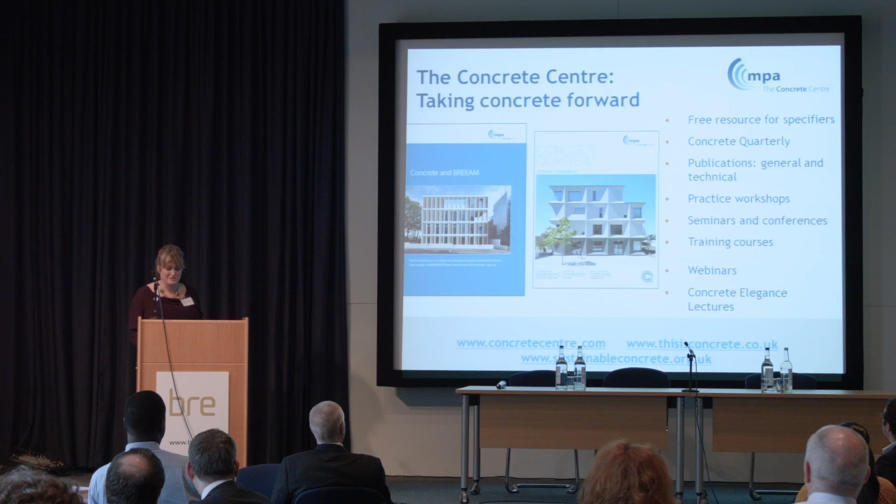One of the publications we've produced is this one, Ahead of the Game, which is outside, and hopefully some of the publications we have brought with us today, but there are many, many more on our website, concretecentre.com.

At EcoBuild earlier this year, one of our main themes over the 3 days was resilience, and we brought together a series of different speakers to talk about the subject, and within this document we've just collated some thoughts about best practice examples. It's an area that we recognise is of a growing consideration.

There's new credits within BREEAM related to it. There's certainly issues in the new HQM standard for homes, Home Quality Mark standard, that the BRE are developing.

But before I go into the role of concrete within resilience, because actually concrete and masonry has a really key role to play within the built environment with regards to providing resilient solutions, I thought I'd just paint a little bit of a broader context about concrete within a sustainable built environment, because fundamentally that's what we're talking about, isn't it?

We're talking today mainly about flood issues, but it's all about sustainable communities and sustainable environment. The industry are very committed to that, and their commitment was consolidated back in 2008, where pretty much most of the concrete and masonry material supply signed and committed to a construction concrete industry sustainability strategy.

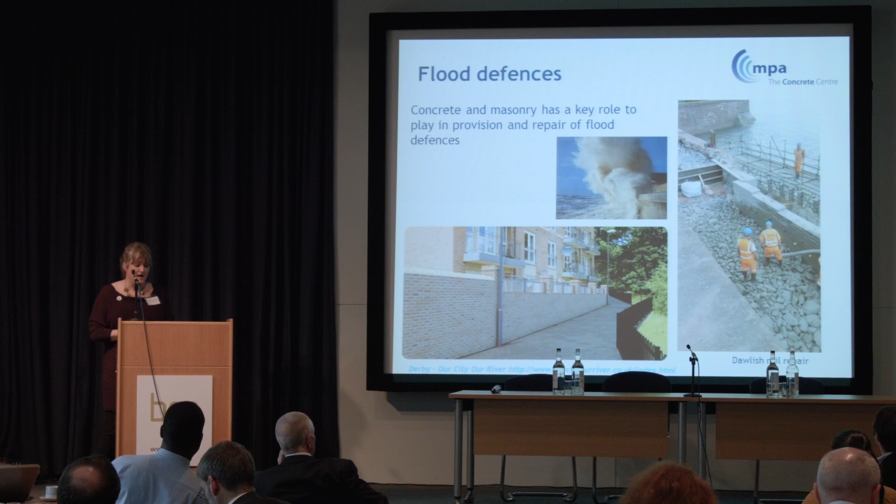It's inherently resistant, it performs well in water. It's why we have concrete sea defences, it's why we have concrete footings and foundations. Concrete can be designed in various different ways, particularly improved to resist aggressive environments like seawater, and in fact a very low carbon cement, particularly with GGBS, is very good at dealing with that.

It's got a real role to play in the use for flood defences and in flood repair. The Dawlish rail repair was completed two weeks ahead of schedule, I think, significantly using off-site precast concrete walls and retaining walls that could be brought in and craned in to resolve those solutions. Now, flood defence is only one part of the whole discussion - we need to be looking at this from macro down through to micro level.

There are many different SUDS products out there that are made using concrete - you wouldn't necessarily make that analogy, but of course there's lots of permeable paving.

It looks like concrete, but actually water just flows through. There was a video mentioned earlier that's gone viral on Facebook and elsewhere. We've got it, you can come look at the stand outside, or we can put it up on the computer - gallons and gallons of water dumped on the floor just disappearing as if by magic. It's quite extraordinary. There's lots of innovation coming through for solutions to help reduce the risk of flooding in and around a home.

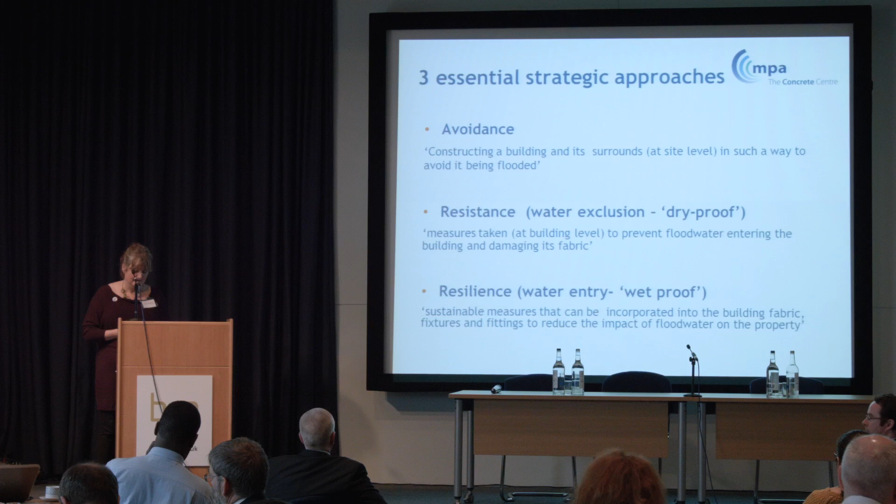I think what's beginning, and certainly what I would advocate, and it seems the new British standard coming out is advocating too, is merging those two approaches together. It's a sensible approach - it's not an exact science predicting floods. So if we can provide solutions that enable us to keep water out, but also, if it does get in, limit the amount of impact, then that's the way to go.

A few years ago we produced some documents and guidance that consolidated a lot of the best practice thinking about designing with concrete and masonry, using it in flood construction. They're quite long in the tooth now, these documents, and I suspect we'll be revising them when the British Standard comes out, hopefully soon.

Within there, one of the key things worth thinking about is that if we get the bones and structure right - making the right decisions appropriate to whatever level of risk has been identified in that building - then there's always the ability to think about what future mitigation measures can be added on as and when required, if deemed necessary. I think the managed adaptation route is an important part to think about.

If you think about it early enough, you can recognize what a strategy might be. For example, on the outside, in early days you might put in stainless steel ties at the low level of the building. You might think about putting in engineering bricks just at the low level because they're more resilient than a handmade brick to the effects of water. Or you decide not to do that now, but know that at a later date, if things got really bad, you have a good, robust structure that you could then just render.

That's all able to do that with the decisions that you've made at an early stage. I think that's one of the ways to be thinking about how we do that. And the key thing is, it's not a million miles away from what we're already doing. And that's what I want to try to illustrate.

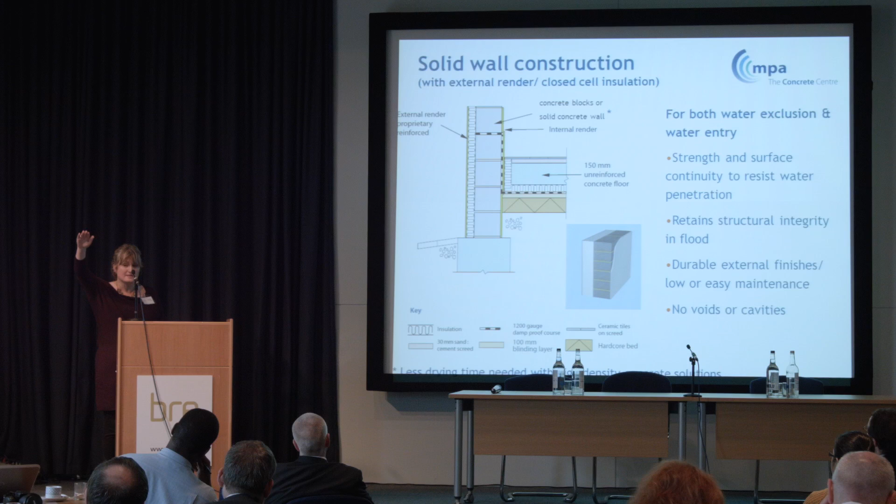And of course, it's robust, stops the water entry, there's no voids in there. The key issue with all of this, actually, it always comes down to insulation, doesn't it? So closed cell insulation, something that's going to be able to be maintained there. Location of where the damp-proof course goes - maybe we just need to be putting our damp-proof courses slightly higher up within our buildings than we do as a matter of course. Maybe that's one way of looking at it.

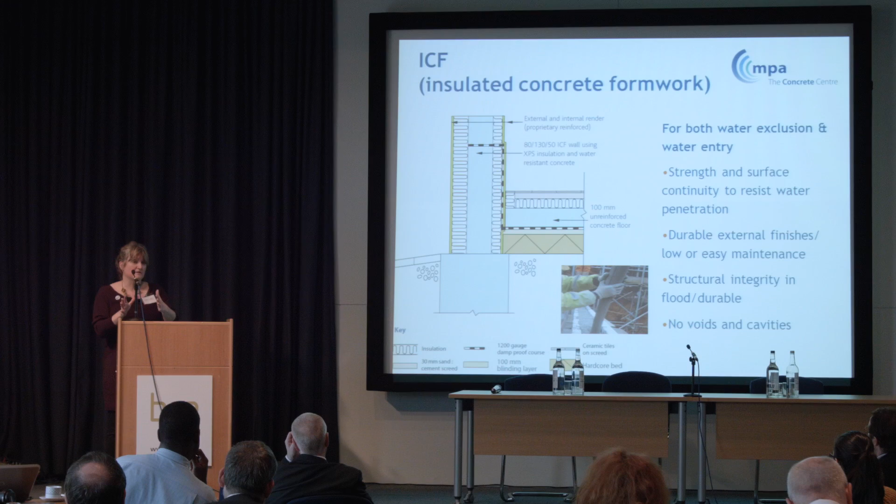There's a very limited amount of on-cost associated with just tweaking how we do these things. Anybody aware of insulated concrete formwork as a construction system? This is something that's a growing part of the market, particularly within self-build as well. It's a very simple way of being able to provide in situ concrete, but using an insulation system so that the panels are stacked together, and that's a permanent mould, if you like, that you pour the concrete into.

Often used for basements. It's a very good water weather-tight form of construction. And again, inherently strong and robust in its ability to keep water out. And depending on where you put your membranes, it allows for drying afterwards.

Slightly more of a challenge with cavity wall construction, which is fundamentally what most of the things that we build within the UK are. I think, did I mention that most housing within the UK at the moment is still, it's about 85 to 90% masonry - that's the way that we build these days, so blockwork and brick.

It varies according to where you are in different regions within the UK, but I think the cavities are the ones that we need to be thinking about, and there's a lot of lessons to be learned from the retrofit market and things that can be done to buildings in terms of closing off weep holes and how we plug those at a later date.

But I think, again, the new British Standards is talking about removing insulation in cavities. That's the right way to go. And yet, of course, you've got regulation on the other side saying we need a lot more insulation than we're currently doing. So there's going to need to be some joined-up thinking there.

I think certainly, closed cell insulation as full fill, that's something that's not going to be moved. Maybe inspections, lots of things we can think about. And I think there's certainly still a role to be had for cavity wall construction, provided we think about the detailing. And actually what we shouldn't forget is that we're still just talking about the lower parts of the building. It's not got to fundamentally change the way we do everything - we're really generally still talking about the lower parts.

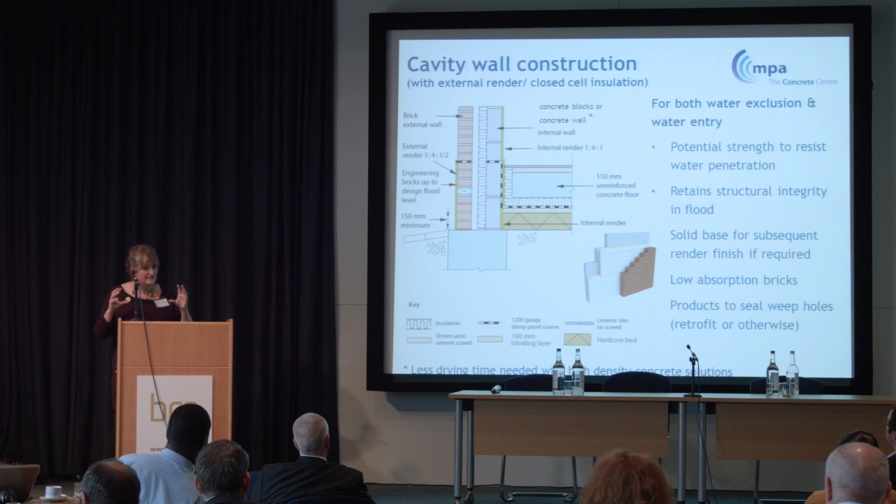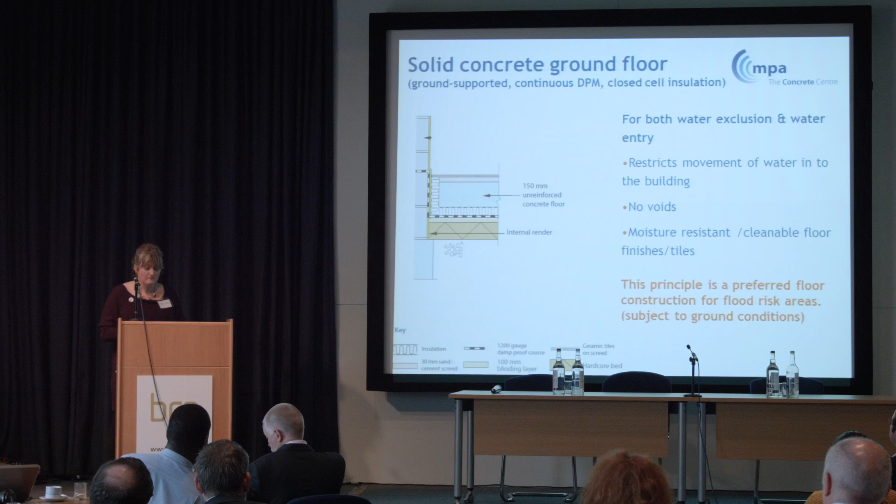In terms of floors, of course, solid concrete ground floor is pretty much the principle for reinstatement of properties that have been flooded, and depending on what the ground surface is, it's still one of the preferred options for construction. But of course, it's not so brilliant if there's a ground swell with water coming up through the ground.

But of course, that's when maybe a raised floor with a cavity, which is actually at the moment what most mass house builders use as a floor construction, comes in - so there's a void underneath. The key issue there is just making sure that void is then accessible to be able to clear any debris if and when it came through.

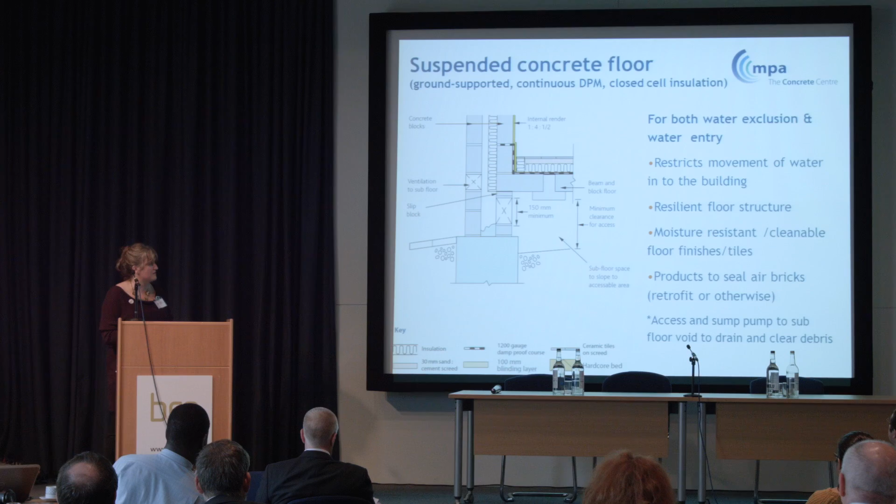So there's a few other detailing considerations which I don't think this is the audience to go through. This is a sort of training that I give when talking to architects - things like stainless steel, wall ties, consideration of quality of workmanship and detailing. All of these are under scrutiny anyway within the industry.

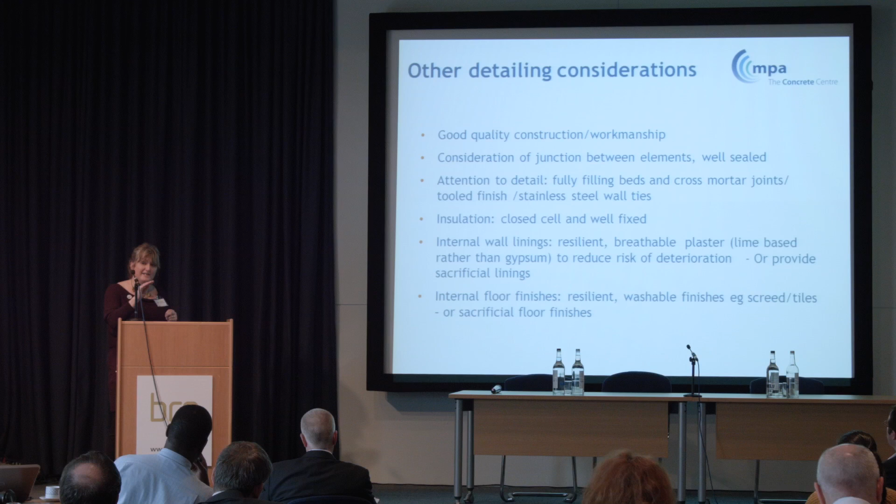There's the whole issue of performance gap. We're all improving air tightness and thermal performance. Adding flood resilience to that menu of things to think about is absolutely achievable.

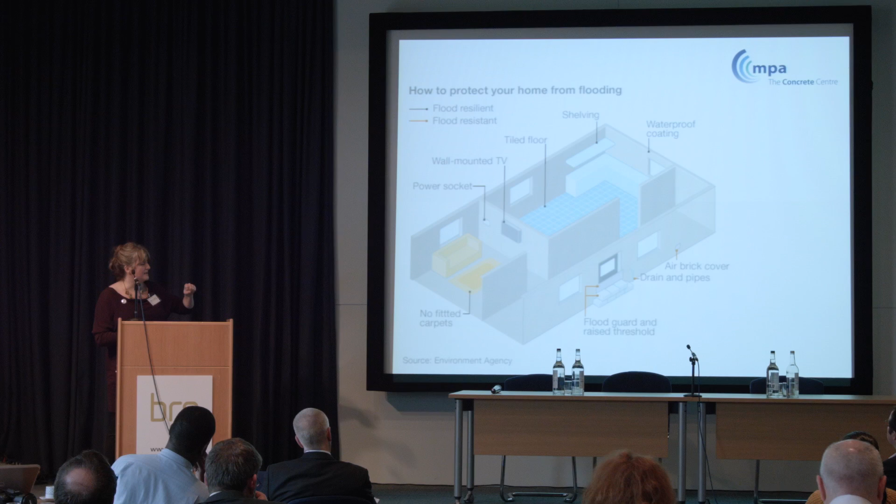And of course, resilience is not just about what you're making your building out of from a fabric point of view. It's about many other things, and I think it was mentioned earlier today. There's a well-known image from the Environment Agency - where the electrics go, putting them in at a higher level, making sure you've got the right sort of fittings, whether sacrificial, or actually using non-fitted carpets and hard surfaces on the ground.

And this immediately sparks an interest for me as an architect - yes, I can do more with that. There's a great synergy there with thermal mass. If you've got hard surfaces, underfloor heating, which is a closed unit, that's not going to be affected by the flooding. Tiles - that's a really good, efficient way of putting low-level energy into a building, but also a means of keeping the building cool.

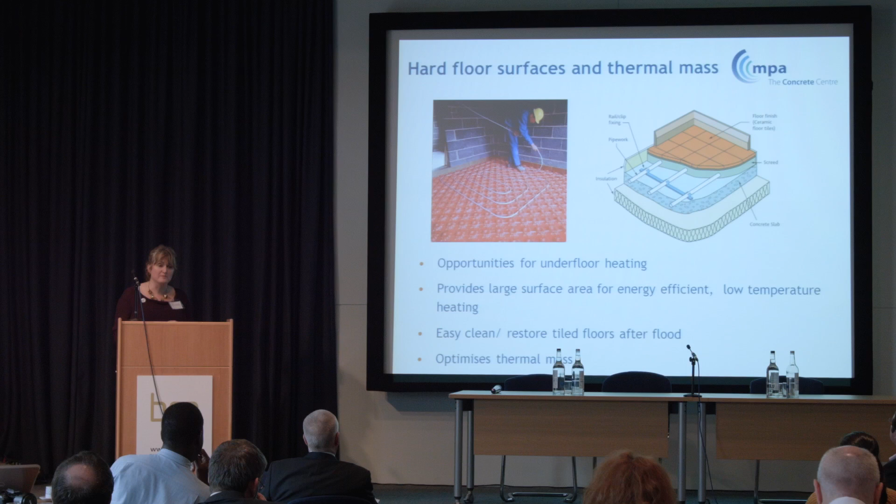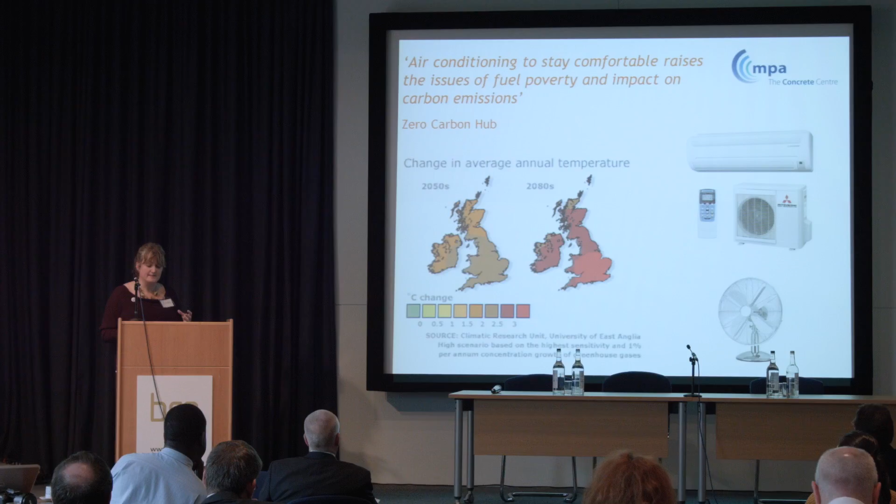And that comes on to thinking about how we need to make our buildings meet lots of different requirements. We know there are growing issues with regards to overheating in new houses in particular, and existing ones - temperatures are rising. We don't want to get into a situation where people can't afford to put on air conditioning in the summer.

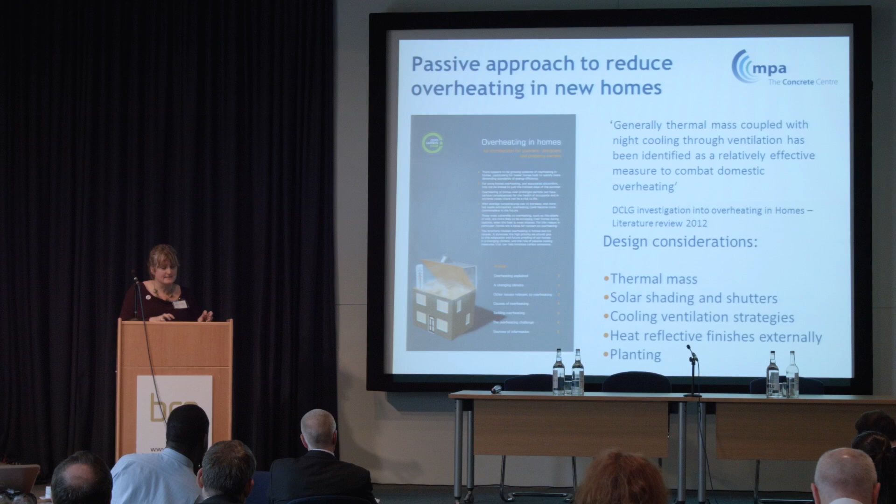And thermal mass is recognised in lots of different reports - Zero Carbon Hub have done a lot of work on this, NHBC Foundation. Thermal mass with ventilation is a recognised means of keeping buildings cool in the summer as well. So this is where some of the thoughts of being able to resolve one aspect of resilience can help resolve some others.

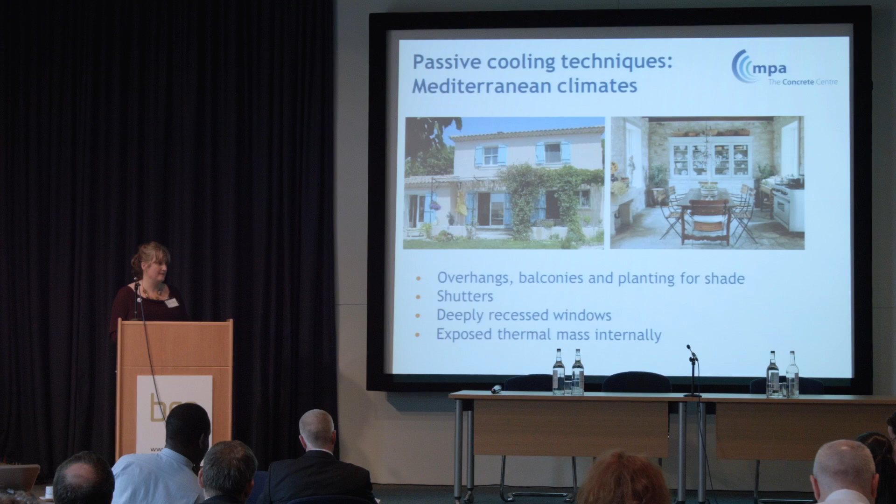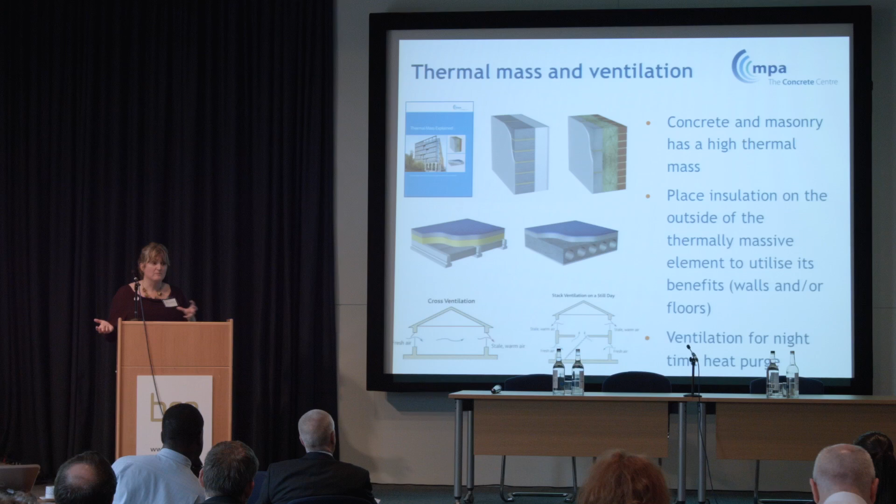And then, well, how does that work? I just think back to those sunny days down in the south of France - fundamentally Mediterranean-style housing, often with solid floors, massive walls, shading that's enabled people in environments where they're used to trying to keep the sun out, keeping themselves cool using shutters. There's that drive - concrete and masonry is very high in thermal mass. The key thing is just getting the insulation on the outside, and then you're able to use the fabric of the building to help reduce the amount of energy used for heating or cooling.

Sometimes I could spend a whole hour just talking about how you use thermal mass and how you design for it, and I'm not going to go through that today. We haven't got any of these documents with us today - I have one of them, but we've got a really good one called Thermal Mass Explained, which is free to download from our documents. If that's something you're interested in, have a look at that or ask me afterwards - I can tell you a bit more about it.

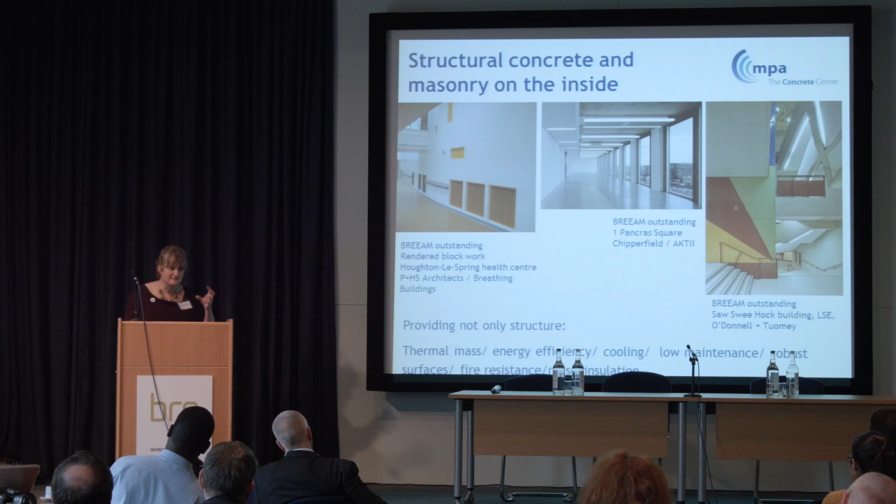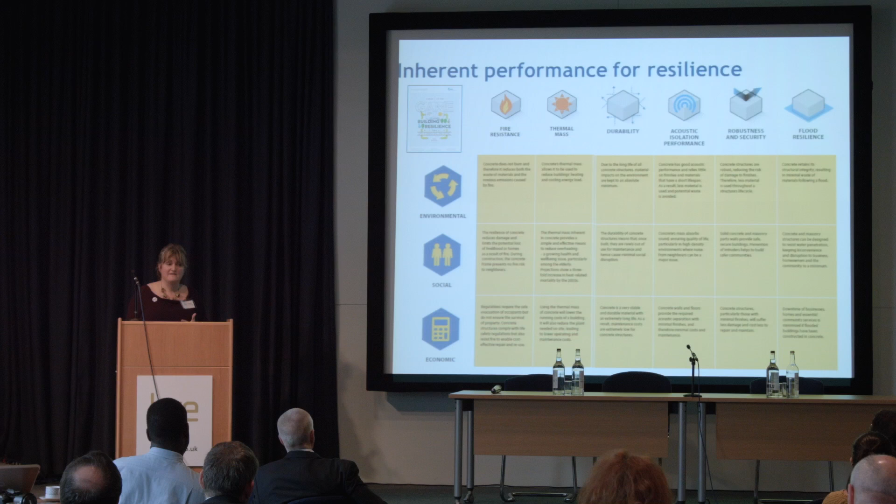But it's a recognised means of keeping our buildings cool. It's the reason why, if you've ever wondered going into any of the new schools that have been built, why there's a lot of exposed concrete around - it might be painted, you might not even notice. Concrete on the inside can help keep buildings cool. It's not just structure, it can provide all of those different aspects in terms of low maintenance, fire resistance and thermal mass. So single solutions are able to meet various different aspects, and it's not a huge leap of faith to recognise that we can do that fairly simply with the way we're already building.

That's it. Thank you very much.